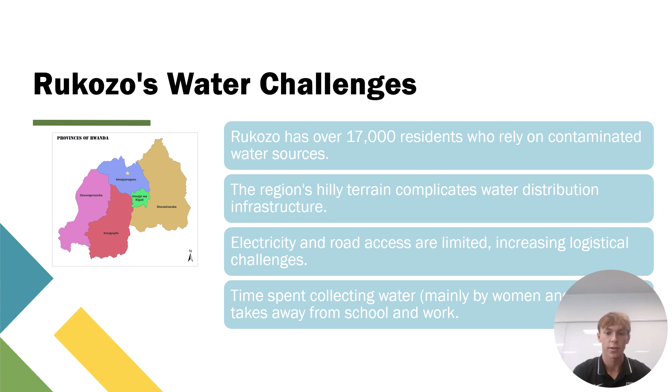Our work is rooted in our faith. The Bible teaches that we are to serve others, especially those without basic needs like water, food, and clothing. This project embodies our Christian values and serves as an expression of love and care.

Luke chapter 3, verse 11 states, John answered, "Anyone who has 2 shirts should share with the one who has none, and anyone who has food should do the same." In this verse, John calls us to share with those in need and give what we have to people who don't have.

Our mission aligns with biblical teachings on stewardship and compassion, and access to clean water upholds human dignity and reflects Christ-like love. Service projects such as this one not only reflect faith, but also action.

Partnerships are key to making this project viable long-term. Organizations like Living Water International, whose mission is to provide clean drinking water for struggling communities with a Christian outlook, and Water for People, who would be able to provide the tools and knowledge to complement our engineering work.

Local churches such as North Phoenix and Grace Community Church offer labor, philanthropic funding, and ongoing community engagement. Ideally, we would like to partner with either of these churches, and because Rwanda is a majority Christian country, we would like to partner with a church in Rwanda to make this project a reality.

We explored 2 different truss configurations to simulate, design A being this X-brace, proving structurally superior in managing lateral loads such as wind, which was critical when we were thinking about building a tall infrastructure for the water tower.

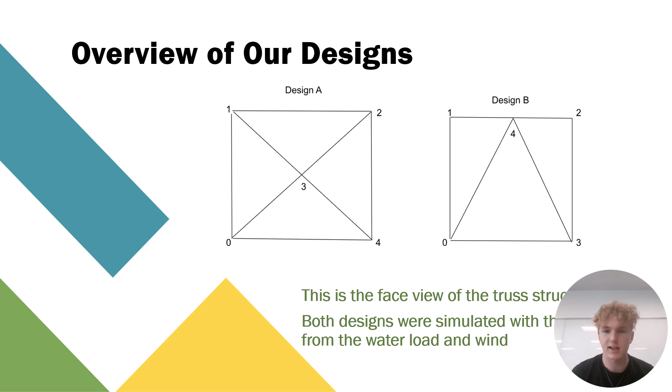Design B was this reverse triangle. It proved less structurally sound when introducing forces with the wind and the water weight, as the triangle did not tend to take off any of the vertical load.

Once we picked our designs and our measurements, we had to decide on how much water we wanted to store, which we went with 1,400 gallons for a city of 700 people, meaning each person would need half a gallon of water per day. So this would be enough for a 4-day supply, which would be plenty since it rains a lot in Rwanda.

And then for the force distribution of the mass, we multiplied 1,400 by 8.34, which is the pounds per gallon, and this was the total force from the water capacity. Dividing that by 4, we got the force of the weight acting on each joint, and then we did that again for half capacity for the other simulation we were going to run.

And then to get the wind force, we use the equation: the force is equal to one half the coefficient of drag multiplied by the air density multiplied by the cross-sectional area multiplied by the velocity of the wind squared. We got the cross-sectional area of our design, multiplied that by the drag coefficient and the density of air.

And then for the speed of the air, we got it as 9.74 meters per second, getting 4.91 for the average wind force and 19.65 when we double the wind force.

And then to do the hand calculations for the first design, we would get the global FBD, and then we would get the support reactions from the global FBD by summing forces and summing moments. Once we have those, we have the support reactions at the pin and roller, which we can use to study the different joints, and studying them and doing the cross-sectional cuts, we were able to get the other forces, and the work is all present here.

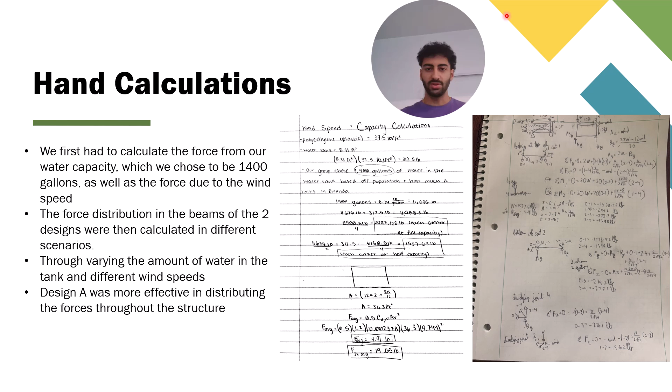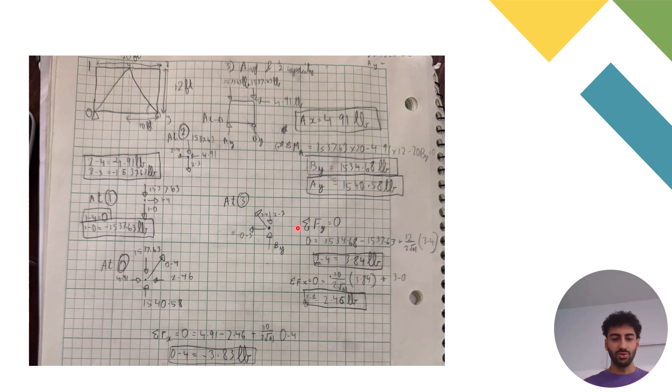These were the hand calculations for design B, which were done in a similar manner. First, we would get the global FBD, getting the support reactions by summing the forces and moments, and then studying the different joints, we were able to get the different forces simply by summing the moments.

We simulated each design in SolidWorks. We did 12 simulations, 6 for each design. Each simulation was with or without wind at full or half capacity, average wind, or twice the average wind. Each simulation was a different combination of those.

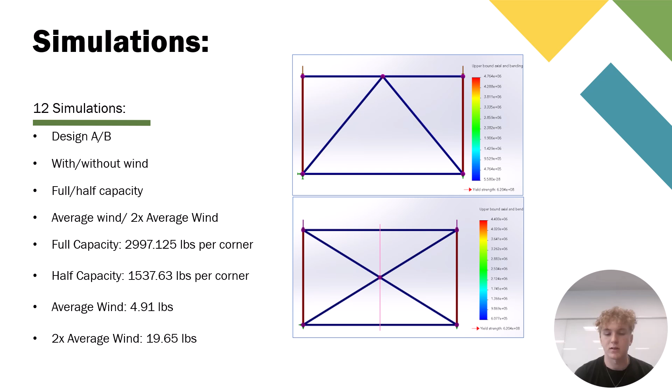As stated before, we got our full capacity weight through the hand calculations, with our full capacity being under 3,000, our half capacity just over 1,500, and then our average wind speed being under 5 pounds, and twice the average wind speed being just under 20 pounds of force.

We took our results and put them into this table. There's a lot of numbers, but basically to sum it up, design A was much better. The X-beams being placed at the corners helped with just distributing the vertical weight, whereas in design B, pretty much all the weight was just on the beams 0, 1, and 3 to 2.

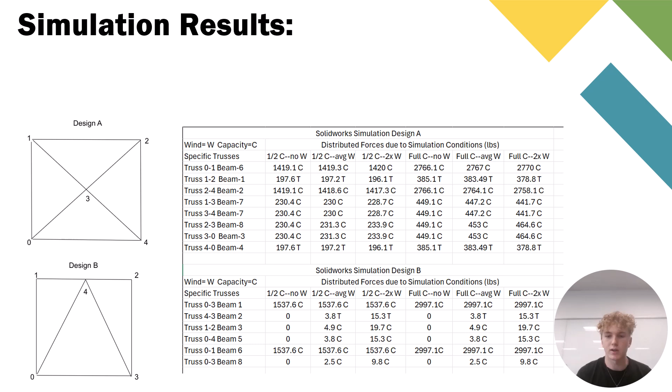The triangle beams really provided no support for the vertical load at all, and then there was really nothing to help with horizontal loads as well, whereas design A helped distribute the weight of the wind that was being pushed on the truss, as well as the vertical force was being distributed slightly more, so it reduced the vertical load, which would therefore make it a more sound and stable structure.

Once we had the hand calculation results and the simulation results, we were able to get the percent errors for each beam on the force there. For design A, we can see that the highest percent error is 2.48. In design B, most of the percent errors are less, but we did have an inconsistency where the simulation got a zero-force member, which was different to the one we got from the hand calculations. This meant that design A was more coherent and more consistent, which made us think that it's more realistic, and therefore a safer option for our project.

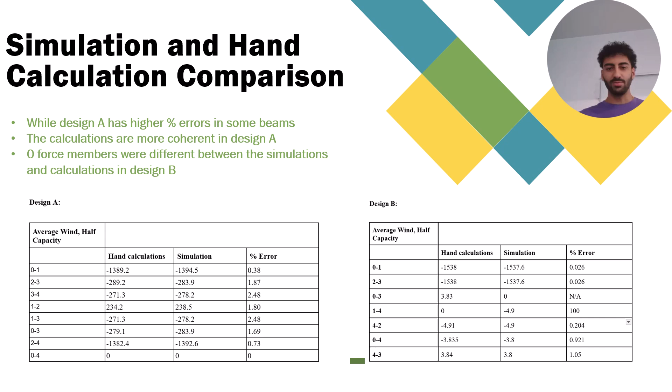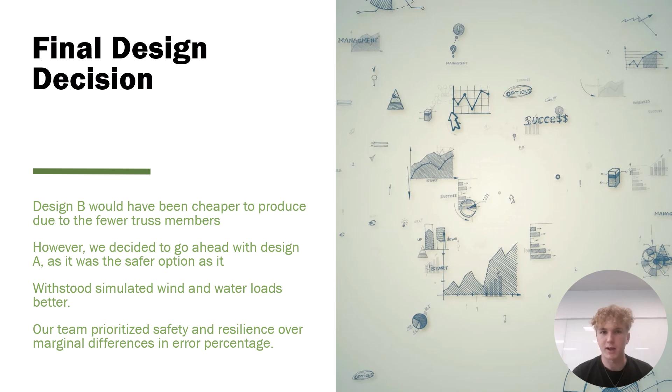We had 2 factors that really affected our final decision. One was price, and one was efficiency and how well it was supportive as a structure. Design B would have been cheaper to produce. However, we decided that design A was much more structurally sound and would be a lot more durable and lasting. It withstood the wind much better in the simulations, and we wanted to prioritize resilience over small things such as price. The pricing wouldn't have been much different, and so we figured it would be simpler and better and more durable to go with design A.

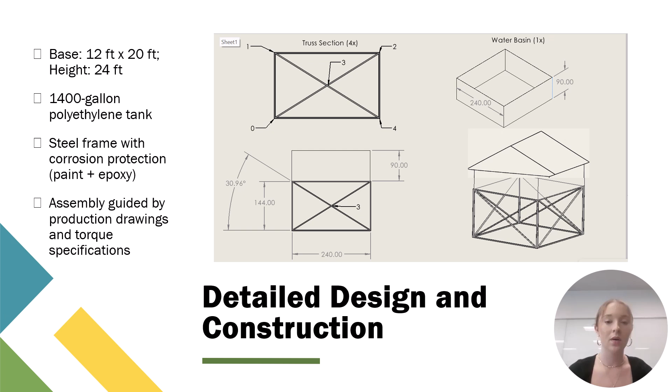This is our detailed drawing for design A. This includes both a 1,400-gallon plastic tank and the dimensions of our steel truss structure. The structure was carefully planned with practical assembly steps. Every component from the supports to the coating was selected to enhance longevity and ease of construction.

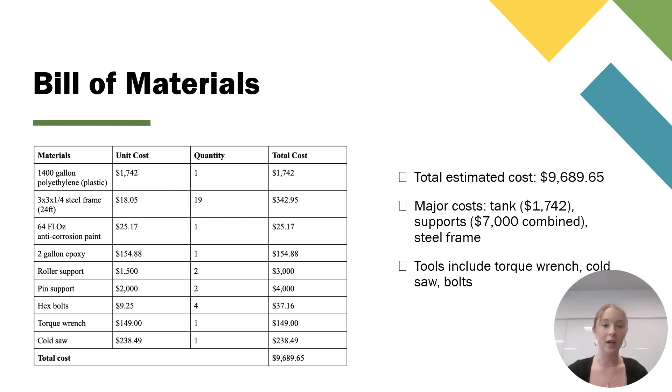Our bill of materials for design A is estimated to be a total of around $9,689. While slightly over our budget, our cost reflects an investment in safety and durability. We believe this one-time cost will minimize future repair or replacement expenses. Our chart includes the tank, supports, steel frame, tools to build the tower, and the materials to make the structure last.

Our instructions provide clear guidance for construction teams. With appropriate tools and labor, this can be built with basic engineering oversight in rural conditions. Our assembly includes using a cold saw to cut different dimensions of steel tubing to make the structure and attaching the supports to the base. We are using bolts and a torque wrench to secure all of our corners and the tank together.

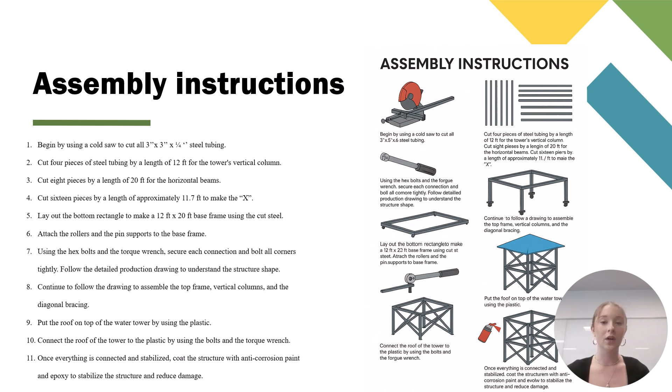Our water tower serves up to 700 people with half a gallon of clean water daily. Clean water brings transformation. It changes lives by improving health, increasing school attendance, and enabling families to thrive. This is not just infrastructure, it's an act of justice. And this is just the beginning. We have a vision for future expansion.

We believe that with support, we would be able to expand in different sectors, such as Rwanda, which is sort of the major area where Rukozo is. We'd be able to scale our design and implement it in different places. We would also collaborate with different GCU missions and the engineering teams here, helping us to expand. We could train the local residents so they could do their own maintenance, empowering them to have more leadership and faith-based development.

Thank you for watching our presentation. We're excited to continue learning and applying our engineering skills to real-world needs. Thank you.